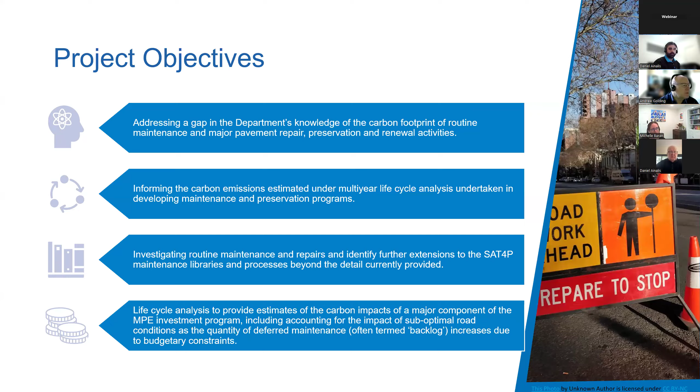So this is the carbon or greenhouse gas emissions. I'll use those terms interchangeably throughout this webinar today.

The upfront carbon looks at what are the carbon emissions associated with the input materials, the transport to the construction site, and the construction of that infrastructure. So it's once you get it ready to be used, and that's really the focus of a lot of initial pieces of work.

It's how much carbon is associated with putting together some infrastructure. If you then move on, the infrastructure or asset gets used, it has its operational life, and there's emissions associated with that around things like maintenance, repair, replacement, refurbishment. There's all those sorts of activities you'll be doing to keep the asset in good condition or keep it going. There's also then down the bottom operational carbon.

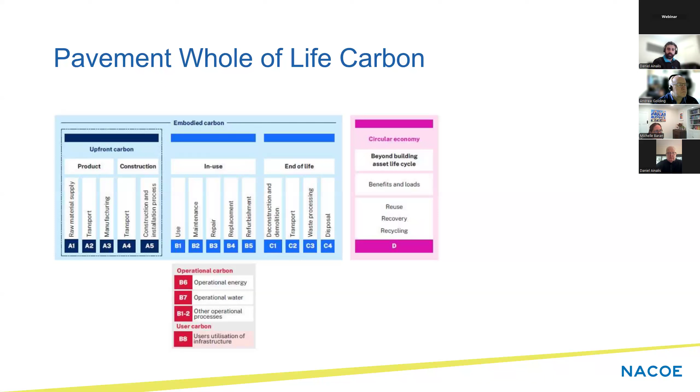So that's just a quick overview of the whole of life carbon. We did some previous research a few years ago when we were looking at pavements, and we were looking at the impacts of each of these different elements into what's their contribution to that whole of life carbon.

Some of the headline findings from that was there was 95% of the whole of life carbon was associated due to the enabled emissions, that B8 category. And this is essentially the users who are using the road - the vehicles driving over that asset. Around 95% of the whole of life carbon is associated with that.

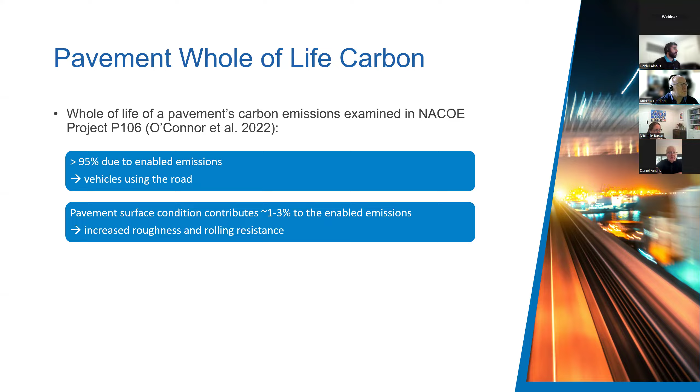Another finding was pavement surface condition. So the roughness primarily can contribute anywhere from 1 to 3% of the enabled emissions, and that's through increased roughness of the surface, and then there's also some increased rolling resistance effects.

Another interesting finding was that the maintenance carbon emissions - when you're over the life of the pavement performing various maintenance activities - those carbon emissions are often greater than that initial construction phase carbon.

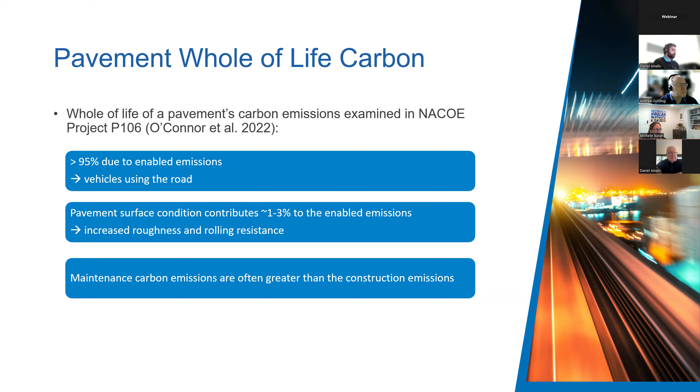So if we take those findings, that maintenance has a significant impact, and the enabled emissions are by far the greatest component of that whole of life carbon.

There's another factor that's being introduced now, where we're seeing low and zero emission vehicles increasingly being adopted. So we're seeing that not just in the passenger and light vehicle space, but increasingly in the heavy vehicle space. We're seeing a number of electric heavy vehicles starting to come out onto the roads, replacing our conventional internal combustion engine vehicles of diesel and petrol.

Low and zero emission vehicles have a number of challenges. We're changing the fuel source - if you think of a switch from a diesel truck to a battery electric truck, you're moving from a diesel tank to batteries on board. These vehicles are posing different challenges in terms of, can you maintain the same freight task? There's also a lot of challenges around increased axle loads from that change in fuel storage, or energy storage now, on the vehicle.

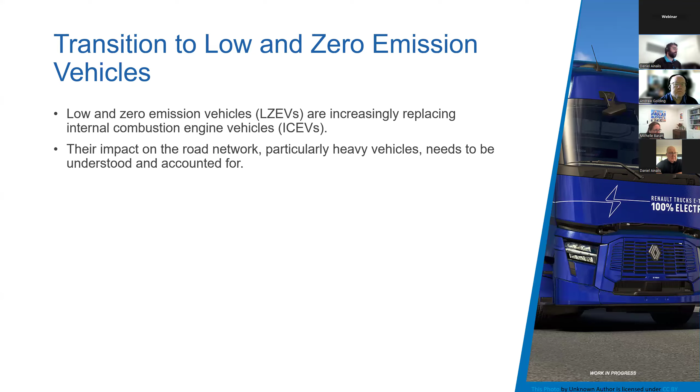The impact of these new vehicles on the road network also needs to be understood and accounted for, because they'll have an impact not just in the carbon footprint, but also in managing and maintaining that network under increased loading conditions. This project also supported and fed into one of our parallel NACOE projects, called A68, Impact Assessment of the Introduction of Low Emission Heavy Vehicles on Road Transport Infrastructure.

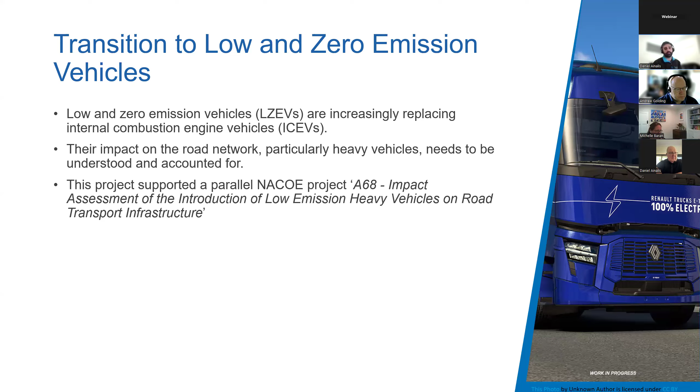And so just a brief overview. So this project A67 ran for 2 years. In the first year, we focused on really a review to establish what's the best practice for modeling enabled carbon emissions, and also reviewing pavement treatments under the MPE program and development of a wider catalogue of embodied carbon emission estimates. And then throughout the second year, we worked on developing a series of demonstration tools.

We'll talk a little bit about that soon, but that was one to calculate the enabled emissions, and also to calculate the embodied carbon from maintenance treatments. And then we also applied those tools to a trial application of a framework, and that was really looking at, can we generate some results and get some further insights into what are the changes in carbon from enabled emissions from the vehicles, and also the impacts of the maintenance emissions as well.

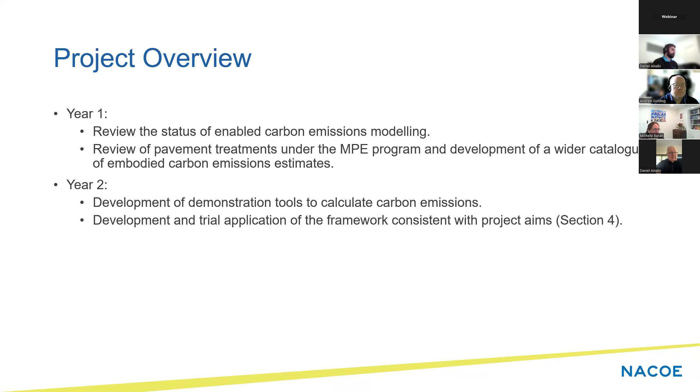So now let's go to emissions modeling. I'll start with the enabled emissions modeling focus. So when we started this, we were looking at what data currently exists within TMR, particularly within the pavement management system, that can be made available to estimate carbon emissions. So what sort of data do we have that we can start with?

So the main data sets that we identified were the average annual daily traffic, so AADT, and that composition. So what's the breakdown of that daily traffic? Is it passenger vehicles? Is it heavy vehicles? What sort of classes they are? There's information around road geometry, vehicle travel speeds along the different roads, and also pavement condition, primarily roughness.

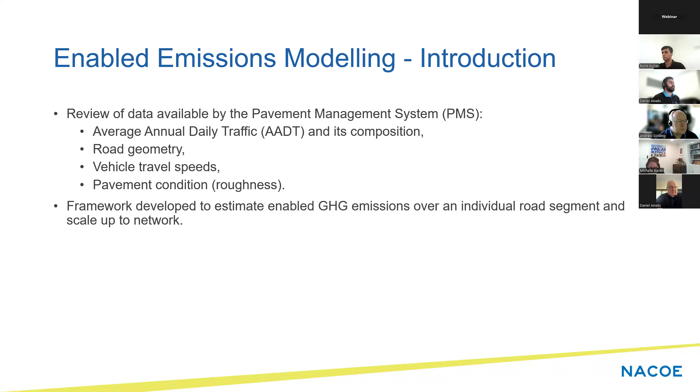So from starting with this data, we then looked to develop a framework to incorporate this data where we can estimate the carbon emissions over an individual road segment, and then how can we use that to scale it up to a network level. So in terms of the modeling, we've spent a number of years working and really putting together a lot of the pieces for the ATAP guidance.

A suitable method that can be applied using the data available is under ATAP PV2 road transport. And what this model enables us to estimate for the different types of vehicles is fuel consumption. And we've also done some adjustments for electric vehicles to be able to calculate the energy consumption as well. But the basic approach for the fuel consumption is there's a number of different empirical factors, and we can scale them depending on various inputs.

So if we look at this equation here, a number of the inputs we can see are the vehicle speed, so how fast is the vehicle going? What is the roughness in terms of the International Roughness Index, the IRI? What is the gross vehicle mass as well? So the vehicle mass will also have an impact. And then K1 to K5 are model coefficients, and they depend on things like road geometry, elevation and other factors.

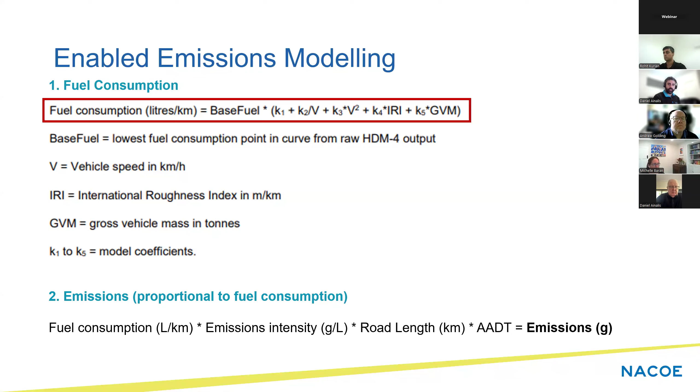So I've got a bit more detail of that process. There was obviously some work that we had to do around vehicle matching. The vehicle types that you have, for instance, typically in pavement management systems around AADT, how can you convert that or map that to a vehicle that is aligned with the modeling framework? So we've done a number of bits around that.

We've also pulled data from various sources looking at distributions of vehicle types across the different classes. We've pulled out some data from the National Greenhouse Accounts factors around emission factors, and then really just combining that to work out at that road segment level, here is the total emissions across that section.

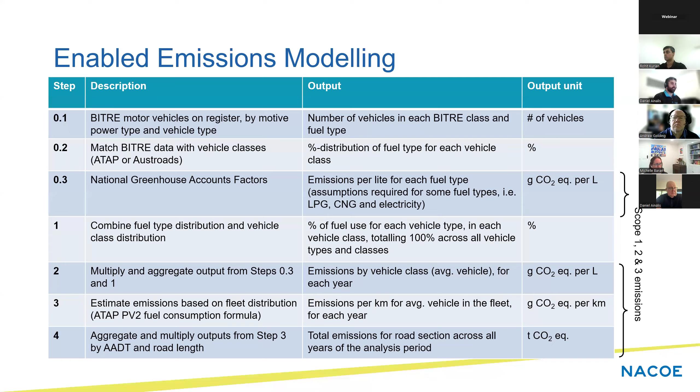And so as part of this, we've also developed these demonstration tools that I mentioned earlier. So under that framework, we've got two spreadsheets that we've developed. So this first one is around how you can use it to calculate the greenhouse gas emissions from the enabled emissions. What I've just got here is a little screenshot of the main sheet, which outlines all the different individual sheets that form the demonstration tool. So it's a standalone tool where you can see how this framework has been implemented to calculate the user emissions.

So it's got a workflow sheet that explains how the tool works, what are the underlying models and equations and formulas that sit there. There's some input sections as well. So, putting in your input road scenarios, and those are aligned with the input data available from the PMS.

We've also got some sample fleet and electric vehicle uptake scenarios that you can select from, just to illustrate that if you have a high uptake of EVs, how will that impact your carbon emissions? If you have a low uptake, how will that impact? So you can do a little bit of a sensitivity there. And then the remaining sheets are providing those calculations. And then there's obviously supporting data that goes into those calculations in the tool.

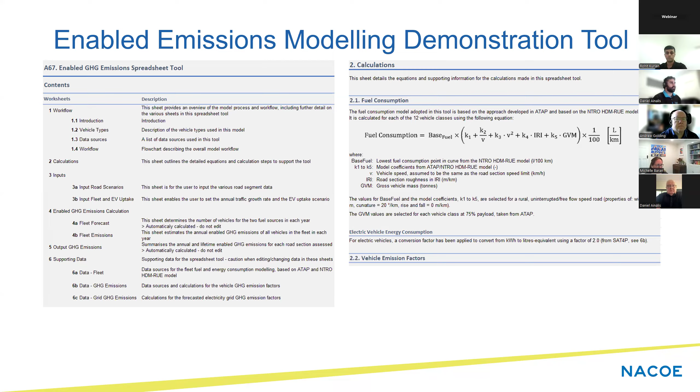And so this is just a little screenshot of part of the calculations sheet where you can see it's got similar information to what I just showed on the previous slide around how the fuel consumption is calculated. In terms of the workflow of the tool, this also sits in one of the workflow sheets there in the demonstration tool. And what it really does is step through how you can interact with the demonstration tool and what happens at each step.

So it starts with the road scenarios saying, go to sheet 3A where you need to input the following data: length, speed limit, AADT breakdown by the Austroads 12 vehicle classes, and a forecasted IRI over a 30-year period. And then you can go in and select your input fleet and EV uptake. And then it steps through how the fleet forecast is performed. So that's the migration from ICE to EV. And then there's essentially the calculations that will show it at different levels of granularity.

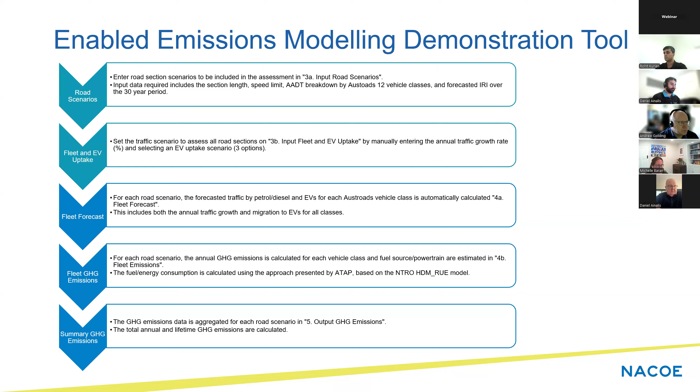So this is just a little screenshot showing that input road section. So you can see there's 3 components here, which is inputting your road section scenario. So you might want to test, for instance, the same road, and you might want to see what's the impact of a different speed limit. So you can then put in your AADT breakdown in the next section, and then there's obviously that forecasted road section roughness.

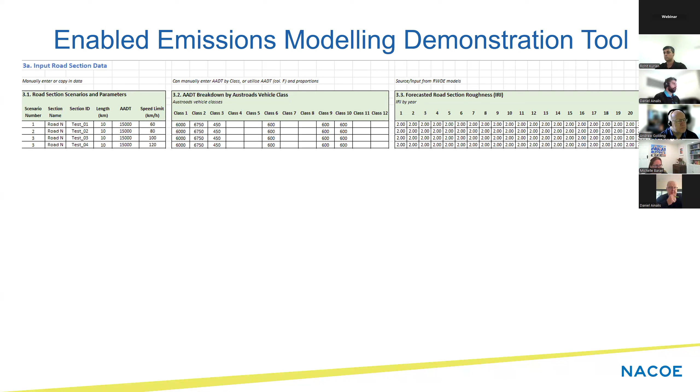And this is just showing a little bit around what that output looks like. So you can see for each road section or scenario that you evaluate in the row, the annual greenhouse gas emissions for that road section. So that's combining whatever composition the fleet is in at that point in time. And then you can see that over the lifetime at the end as well in that final column.

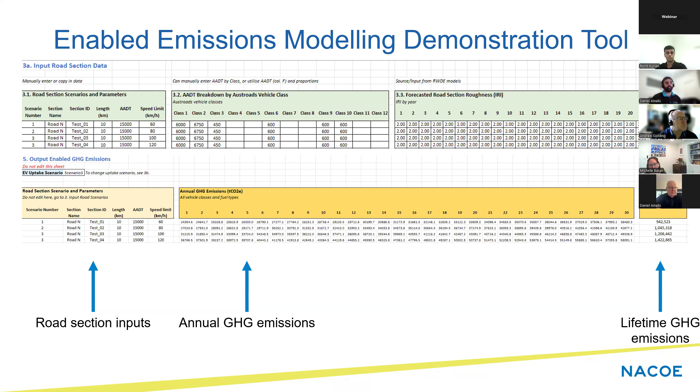And so next we're going to talk about the embodied emissions work. And so Rohit, I will hand over to you. Thanks, Daniel. So I'll now go through the embodied emissions modeling component of this project. So embodied emissions refers to the emissions relating to the maintenance, preservation, rehabilitation, and renewal activities on existing road pavements. So essentially, we're looking at the emissions relating to road maintenance activities.

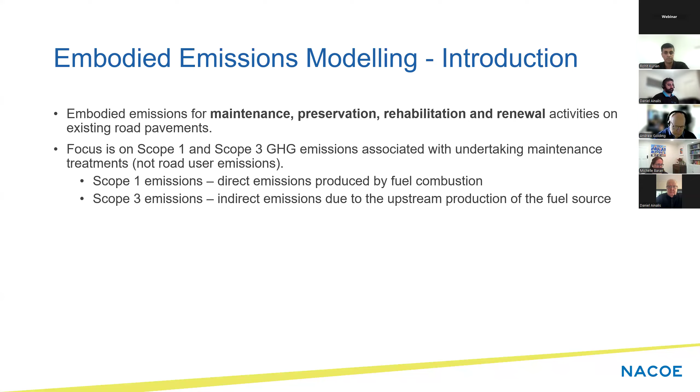It is important to note that for the embodied emissions modeling, we're focused on the Scope 1 and Scope 3 greenhouse gas emissions, which are the direct emissions produced by fuel combustion and the indirect emissions due to the upstream production of the fuel source. Next slide, please. So in terms of the overall methodology, we first compiled a list of TMR's current library of pavement treatments, which are classified as either surfacing treatments, rehabilitation treatments, or capital works. We then map these treatments to the equivalent processes within the SAT4P tool.

So these SAT4P processes provide the emissions factors for the pavement materials and the construction activities that we used on this project. For the emission sources that are included in the modeling, we have the emissions from the material production, the fuel use from the construction activity, which is the diesel consumption of the plant and equipment on site, and also the transport of materials to the site, including empty vehicle return trips.

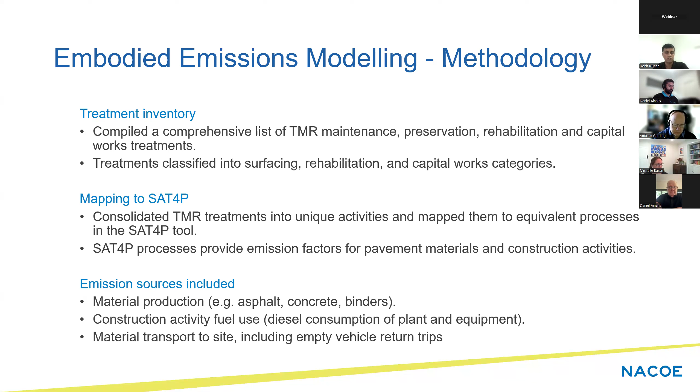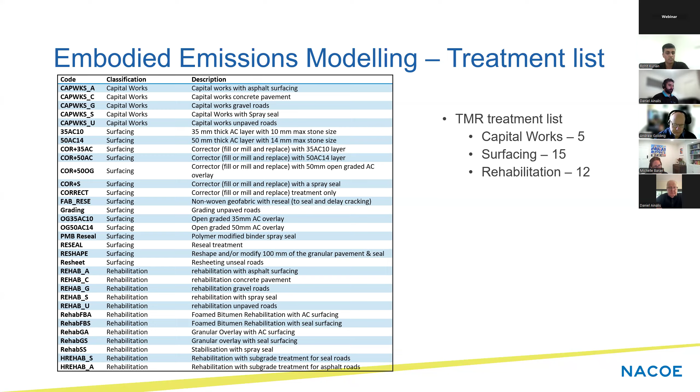Next slide, please. So this slide shows a summary of the TMR pavement treatment list used on this project. As you can see, we have 5 capital works treatments, 15 surfacing treatments, and 12 rehabilitation treatments. Next slide, please. So similar to the enabled emissions tool, we have developed a spreadsheet-based embodied emissions tool, which can assign emissions to each maintenance treatment, aggregate emissions across multiple treatments over the pavement lifecycle, and also allow the user to scale the results from an individual road segment to network level results.

We also have the main calculation sheet, which is where the calculations are performed to calculate the embodied emissions from TMR maintenance treatments based on the user-defined inputs. So we then have two supporting sheets, which contain the associated data on the emissions factors, the different linkages to the SAT4P processes, and the data on vehicles, products, and materials that are used within the main calculation sheet.

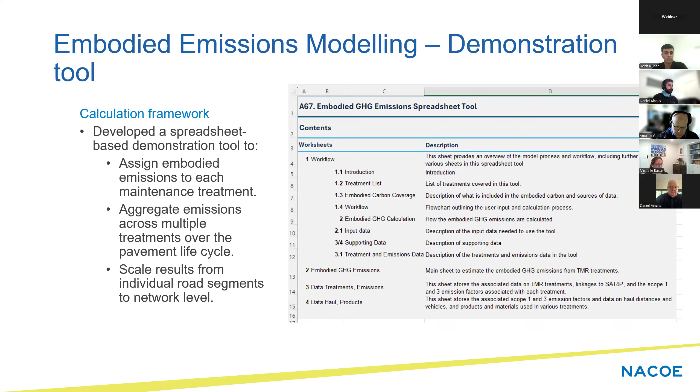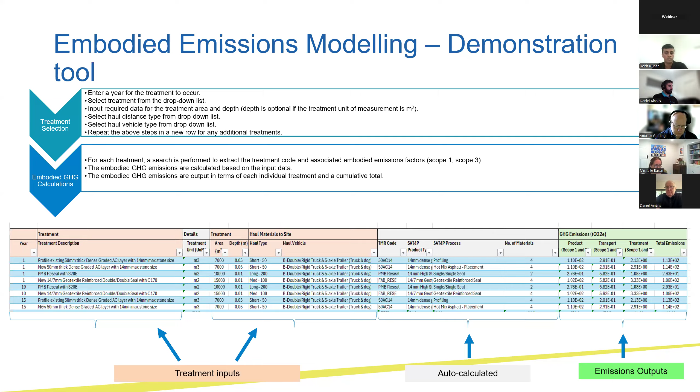And for ease of access, all treatment-related inputs are drop-down lists, with the exception of the treatment year and the treatment dimensions. Next slide, please.

So what this case study basically highlights is the significant contribution of the product-related emissions to the overall embodied carbon of maintenance treatment activities. I'll now pass back to Daniel, who'll go through a trial application of the two emissions tools.

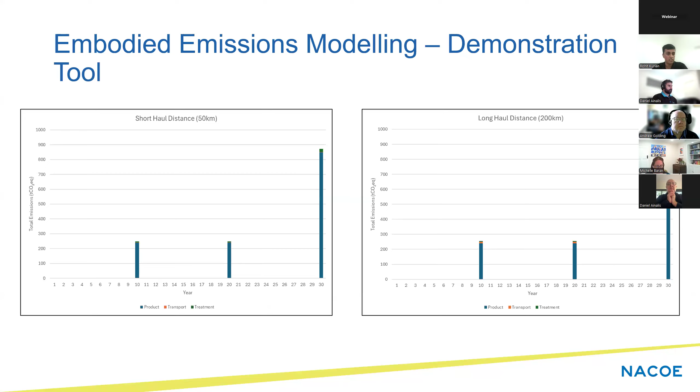Great, thanks, Rohit. So I will talk a little bit about some application of these frameworks and approaches, and show a little bit of how this can look over a bit of a life cycle analysis. So for this, we did some work, and as we mentioned before, this also supported a parallel NACOE project, A68, which was looking into the broad impacts around the transition to low and zero emission vehicles, particularly heavy vehicles.

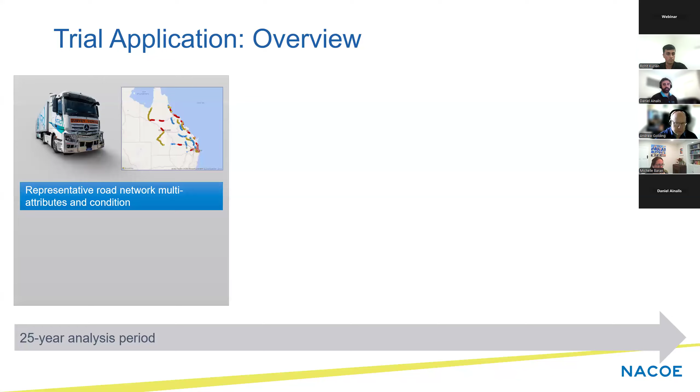So we worked alongside on this, and what we looked at was a representative road network. So it was a coverage of various representative sections across Queensland of different road types and categories and compositions. And so work was done to essentially look at how that would change over time under different conversions or migrations from combustion engine vehicles to low and zero emission vehicles.

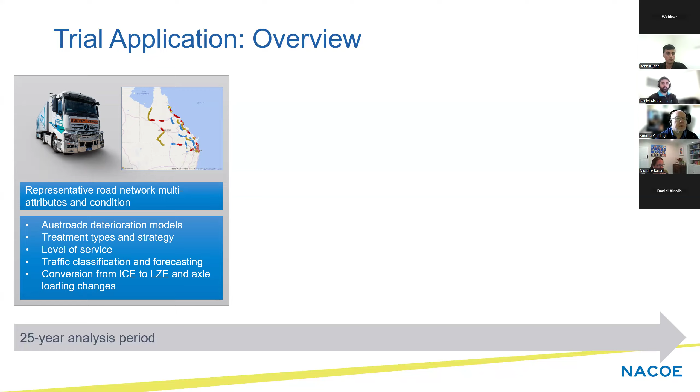Under that forecasting of the different migration scenarios, we did some modeling work to look at the different traffic, pavement condition and various treatment strategies over time. And that was done for a number of different road agency budget constraints. So if we start at the bottom, that's an ideal optimization where there's no constraint in the road agency budget.

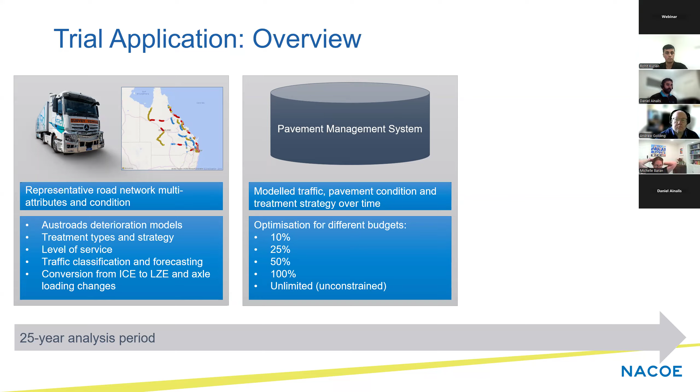It's what do you need to do to achieve the ideal or optimal levels of service and pavement condition over that time. And then progressively reducing that budget so that our modeling work can look at how, under different constrained scenarios, different decisions need to be made in terms of maintaining the network. And then obviously there's impacts that flow on into not just the pavement condition, but also into the emissions.

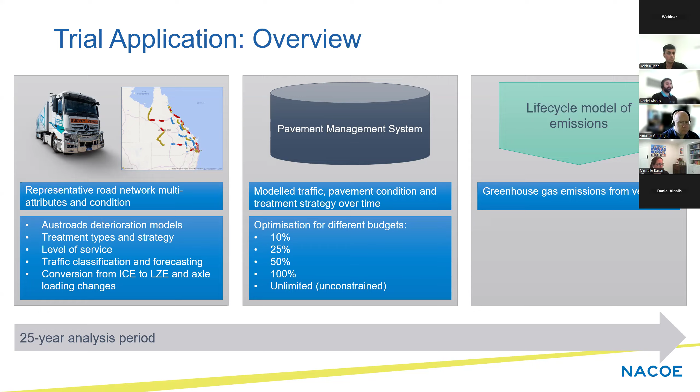And so that's where we use this data to essentially assess the life cycle greenhouse gas emissions from the vehicles using the road, so the enabled emissions, and also from the maintenance treatments that were applied over that 25-year period.

Again, the road agency budget scenarios that we examined, and then we looked at a few different uptake scenarios of low and zero emission vehicles, essentially EVs. So the three cases of that migration were the base case, which assumes that there's no migration away from combustion engine vehicles. Then we looked at a medium and a very high.

So what that essentially looked at is a linear increase that at the end of the analysis period, you had either 66% in the medium case or 100% in the very high case of vehicles that have migrated over. So it's a bit of a staged transition. It's not a what does it look like if everything switched tomorrow.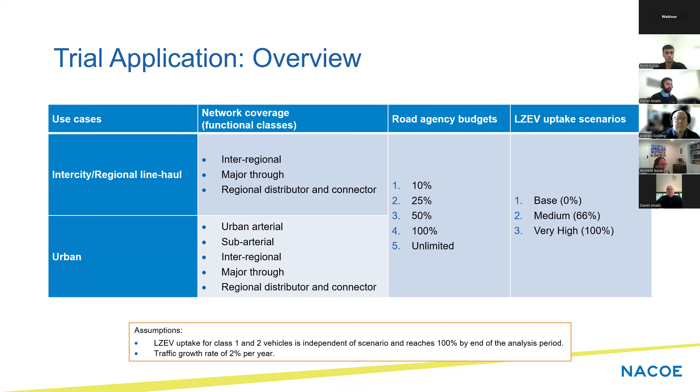So if we start to look at some of the results here, I just wanted to show one example to give you a bit of an illustration of how that migration from ICE to LZEV would happen over time. And so this is showing in the vertical axis the annual traffic for a section. And then the dashed light green line is the total traffic. And then you've got a dark blue and a lighter blue, which are ICEVs and

LZEVs as well. So if you look at the bottom one that starts at 2023, that's the low and zero emission vehicles. And you can see that over time, that progressively increases in the proportion of the traffic until you get to the end of the analysis period, and it's now at 100% of that total traffic.

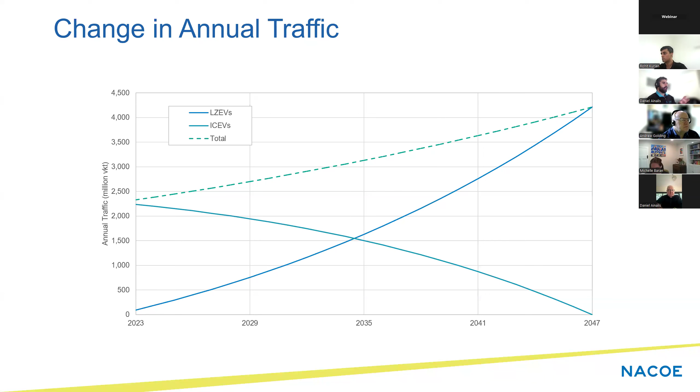So you can see that conversion shown here. So we can do a bit of a comparison and see what that looks like under the different scenarios that we were investigating. So you can see under the base scenario, the ICEV is equivalent to the dashed total line. So there's no migration towards low and zero emission vehicles.

If we look at the medium, you can see there is some conversion. So that's whereby when it gets to the end, around 66% of the total traffic has converted. And then similar to what I showed before, there's that very high uptake where by the end of the analysis period, it's completely migrated to low and zero emission vehicles.

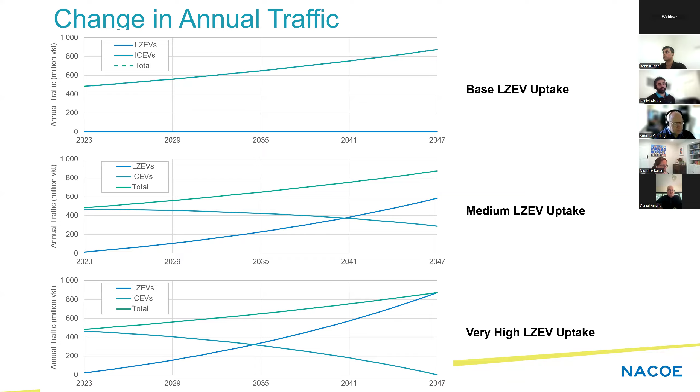So I should add as well that in the supporting data in the demonstration tool for the enabled emissions, there's a forecast of the electricity grid carbon intensity, and so that feeds into the low and zero emission vehicles shown here. So as the grid progressively transitions to more wind and solar or other types of renewable generation, the grid has a lower carbon intensity, and that's reflected as you increase your migration towards those vehicles.

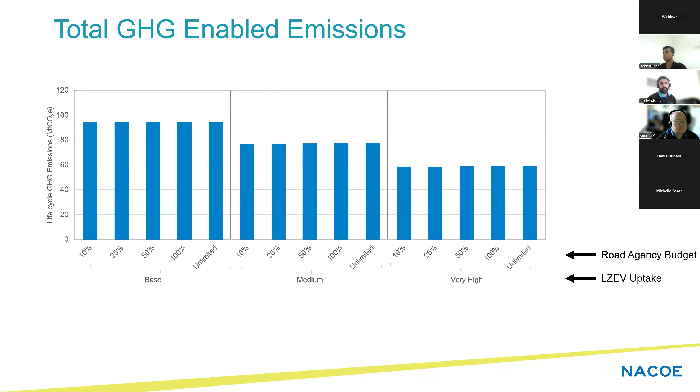So what does that look like in terms of our total? If you go over that 25-year analysis period, we aggregate them all up. In the vertical, each bar shows the life cycle greenhouse gas emissions for the different road agency budget scenarios, from 10 up to the unlimited unconstrained scenario, and for the different low and zero emission vehicle uptake scenarios. What we can see is there are some minor changes across the road agency budget, but the significant changes are observed when the traffic has been migrating away from those combustion vehicles.

I wanted to show this chart as well, because there's not a huge change across the different road agency budgets, and so we looked into this a little bit. What I've got here is one of the examples of the totals again for one of the uptake scenarios, I think it was the base. In the tool, we incorporate roughness. As you move to a less constrained budget, you end up with roads that are smoother, and therefore they'll require less fuel to traverse them, and there's a slight reduction in fuel and carbon emissions as well.

As part of this modelling, we looked at what happens under these different budgetary constraints, where the roads get rougher in certain places and you see more deterioration. When that deterioration crosses a certain roughness threshold, we implemented some speed restrictions. If you're going over a road that's a bit rough, you'll either be recommended or feel it necessary to travel at a slower speed. Under the 10, 25 and 50% constrained scenarios, we saw more and more road sections where we would have to apply a speed restriction because they crossed that roughness threshold.

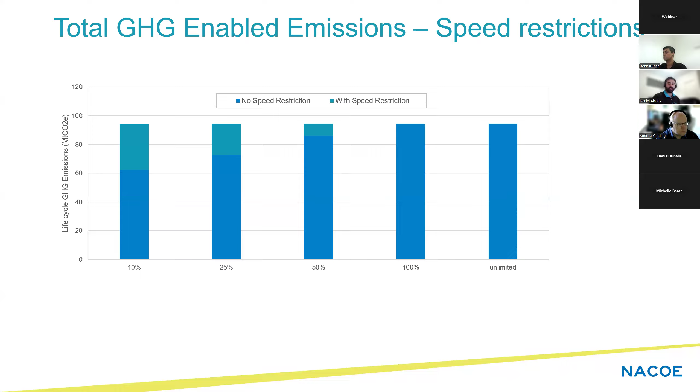So there's that trade-off. You end up travelling slower, but there's a longer period of travel. And so you end up with a bigger proportion compensating for that, but not necessarily offering you any carbon savings from an enabled emissions perspective.

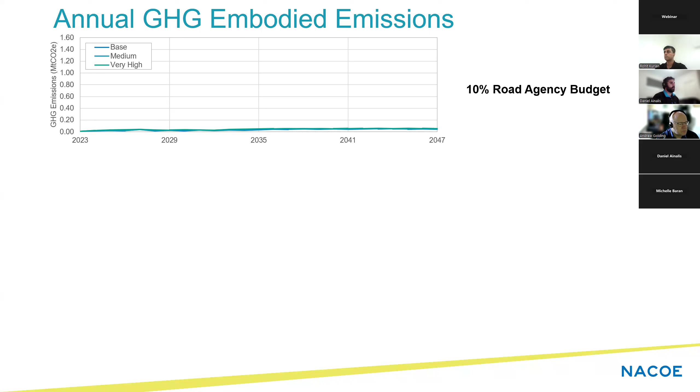Now moving to the embodied emissions, so the treatment emissions over this 25-year analysis period. We did the greenhouse gas emissions each year for a few different road agency budgets: 10% in the top row, 50% in the middle, and then the unlimited, unconstrained scenario. As you would expect, with a greater budget you have fewer budgetary constraints and can perform more maintenance, which means more carbon emissions associated with those maintenance treatments. Interestingly, in the unconstrained scenario there's a large spike at the start, because the optimization prioritizes doing a number of treatments early on, since there are no budgetary constraints.

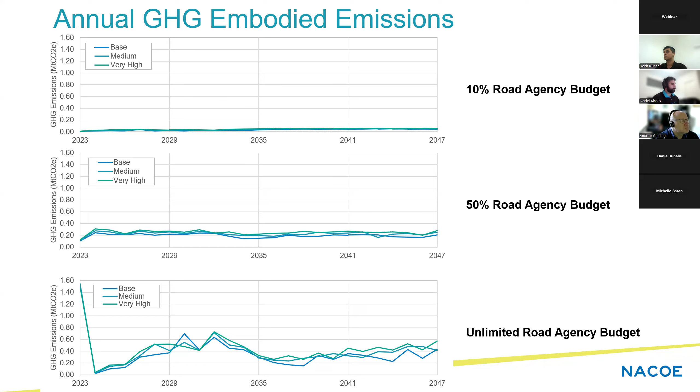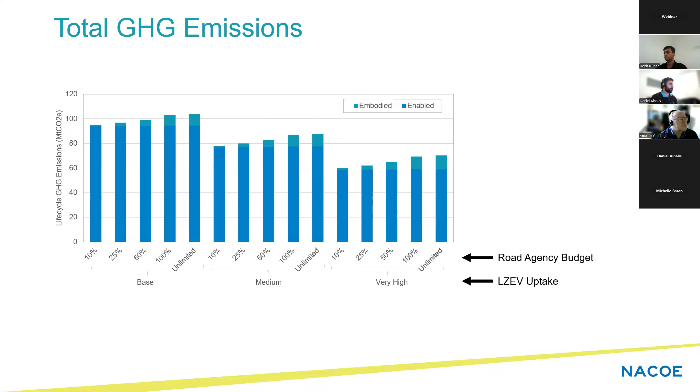So just a quick summary of what we've done in this project. We've developed some frameworks and demonstration spreadsheet tools to estimate the carbon emissions from the enabled perspective, so your user carbon, and also embodied emissions of maintenance treatments. We presented some of this trial application, looking at a representative network for different scenarios and budgetary constraints. A lot of this work also fed into one of the NACOE parallel projects that was specifically looking at the impact assessment of the introduction of low emission heavy vehicles.

So I guess just the key findings, if we can draw out a few real key points on this. If we're looking at the maintenance carbon emissions, the budget is really the dominant driver. And that's to be expected, because if you have a higher budget, you can do more maintenance, therefore there's going to be more emissions associated with more activities. We see the lower budget scenarios obviously show lower embodied emissions, but that implies that there's greater deterioration of the assets.

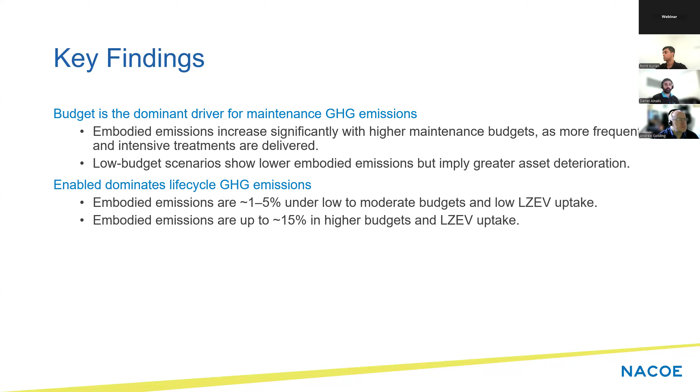In terms of what dominates, again, the life cycle carbon emissions are dominated by the enabled, your road user emissions. Under low to moderate budgets and relatively low or no uptake of low and zero emission vehicles, the embodied emissions are anywhere from around 1 to 5% of that total. As you start to relax those budgetary constraints and increase the uptake of low and zero emission vehicles, the embodied emissions can reach up to 15% in some cases.

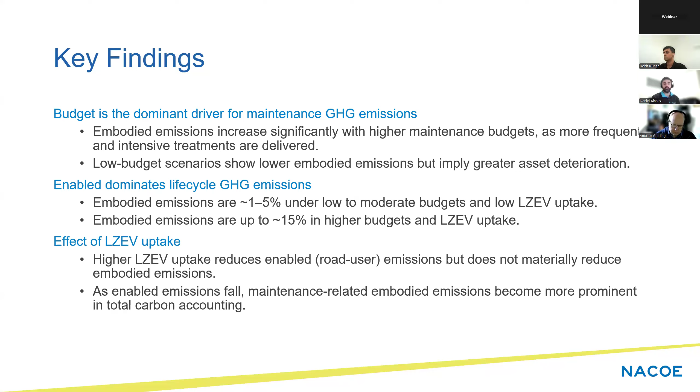So what we saw in terms of the effect of uptake of low and zero emission vehicles, obviously a higher low and zero emission vehicle uptake reduces the enabled emissions, but we didn't observe it materially reducing the embodied emissions. And I think as the enabled emissions fall, if we look at this on an annual basis, there was the trend of the enabled emissions reducing. What we would then start to see is maintenance-related embodied carbon becomes a more prominent feature, and would take up a larger proportion. Over the total life cycle it might be 15%, but when you get to the last few years, it might be somewhere upwards of 90 or 100%, depending on the proportion of low and zero emission vehicles on the network.

So I think that's really the key takeaway that we wanted to communicate from this work, is that while it's probably not a significant impact right now, the maintenance emissions as a proportion of the total whole of life, as this transition away from combustion engine vehicles happens, maintenance emissions and other emissions will play an increasingly large role. And so they'll need to be accounted for and certainly considered.

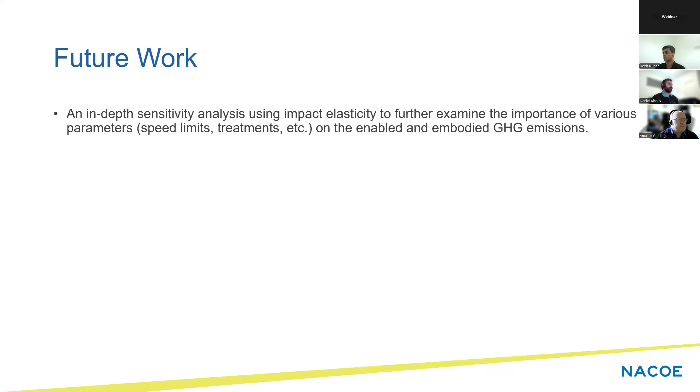And so just in terms of some of the future work we've identified, I think there's a bit more work that could be done to look at some of these parameters in more detail. There's a few interesting elements around speed limits, treatment times, and changing them that could be interesting to see their impact on the enabled and embodied carbon emissions. We did a bit of work in the parallel project looking at the broader road user costs, so your vehicle operating costs and other total transport costs. And I think something that's underrepresented and not covered right now is the vehicle operating costs associated with low and zero emission vehicles, so I think that's certainly something that should be looked at in the future.

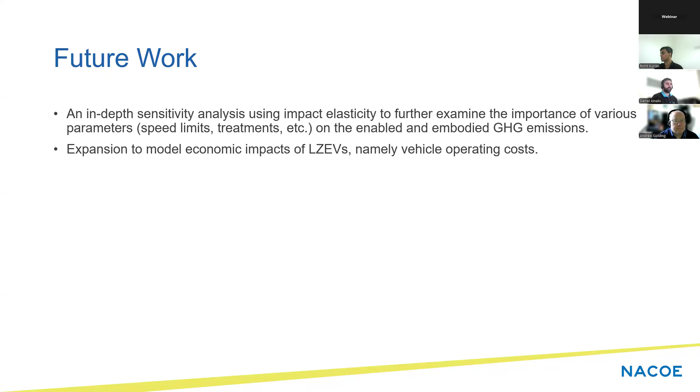And I think in terms of where this research can be used, I'll hand over to you, Andrew, to discuss the implementation aspect at TMR. Thanks, Daniel.

So certainly from a TMR perspective and looking at our network lifecycle modelling, our new ADVICE tool, so asset deterioration, valuation, investment calculation engine, will be the main tool that will implement this capability for both embodied and enabled emissions for our maintenance preservation activities.

ADVICE already has the ability to calculate embodied emissions, in terms of we've provisioned within the structure of the solution that capability, but we still need to do some work to implement that.

So we will use the A67 tool as well as SAT4P to generate some embodied emission rates for each of our maintenance treatments. They'll be defined for each of our road stereotypes and for each district.

For enabled emissions, that's really dependent on, first of all, the implementation of the ATAP vehicle operating cost model, which we're planning to incorporate in release 1.2, which at this point in time is expected in January 2027.

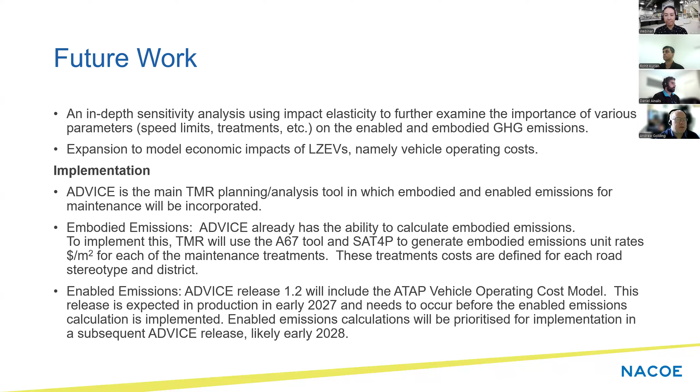So off topic, you mentioned a NACOE project assessing impacts of low emission vehicles. Is there a similar impact assessment project planned for the CML to GML transition that is planned in updates to the HVNL?

Yeah, I was going to say Andrew or Ty, do you want to field that one? So I'll jump in from a TMR side. We don't have a plan to undertake some specific modelling for CML to GML. We have provided feedback based on the A68, which was looking at low and zero emission vehicles, which included a mass increase as part of that assessment. But at this point in time, we don't have a study planned looking at the impact of the CML to GML change. Ty can probably fill in his knowledge of what's occurred at a national level there.

Thank you, Andrew, and thank you also, Daniel, and everyone for the presentation and the attendees. At a national level, we've not had exposure to the actual detailed studies that's been undertaken. But what has been done, an example is in Victoria, a comparison was made between CML and GML in a whole of life case, very similar to what we've been doing, using total transport costs, road user costs, etc., with all the factors that involves. And there's also been some trial calculations lately with several other studies.